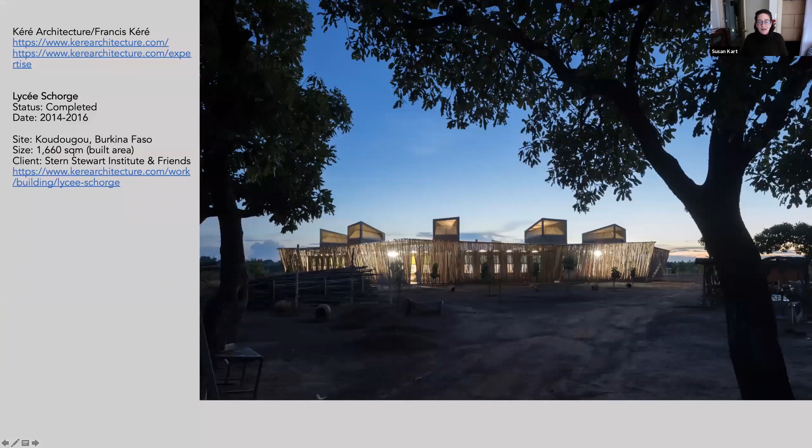So I put together a slide on each of those 10 groups that were in that quick little poll.

I wanted to start with Francis Kéré, because some of you have heard of him and his firm, and he's probably, behind David Adjaye, maybe the most well-known African architect. He was trained outside of Africa, as are most architects currently working on the African continent, since architectural training programs are still in the United States and Europe. Yet he has continued to work in Burkina Faso and East Africa, all over the world.

So what I wanted to show you here in this quick image is a picture of a high school that he completed a few years back. There are a couple things he does that I think are really worth mentioning and worth imitating if we want to steal that and move it forward.

One is the community involvement in his projects. Every project he does, especially on the African continent but not exclusively, he's working with the community that it will be impacting, the community that will be using the space, even if it's a private residential house. The other thing he's doing is working with local materials and local vernaculars—local architectural history, local building strategies.

So what you're seeing here—let me click on this, now I'll have to change my screen share so you can see the Google Chrome window I just opened. Hopefully now you are seeing a page from Kéré Architecture.

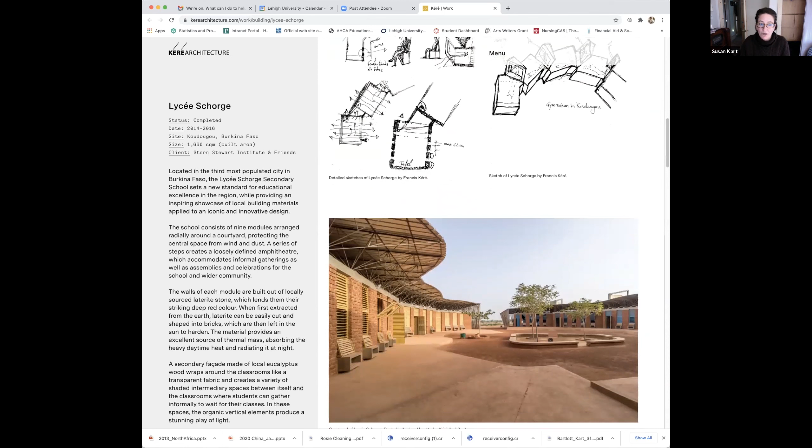I apologize for scrolling a little quickly through his amazing drawings, but what I wanted to get to was this picture of the students sitting outside their school, on these wooden benches. You can see the louvers in action there, which can go up for ventilation but also down for dust. There's no glass in those windows, it's just airflow.

But that wooden screen serves as a dust barrier, a sun barrier, and a heat barrier. It looks like kind of a very rustic fencing structure that isn't exciting on its own, but when viewed within the context of where he's working, it's a lovely way to integrate what's already familiar to people visually with the technology of improving the interior of a school space when you're dealing with tremendous heat, tremendous air, dust, and potentially lack of electricity—so you need to depend on passive lighting and passive air circulation, and those are ways of doing it.

ASA, or Active Social Architecture, is based in Rwanda. It was actually founded by a pair of Europeans who had studied in Italy, in Rome, and then moved to Rwanda and set up an architectural shop there. So while they are expatriates from Italy, many of their partners that they work with are Rwandan or East African to a certain extent.

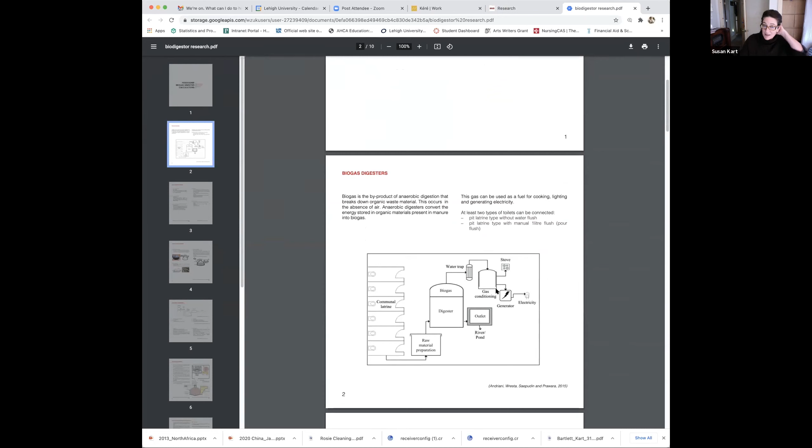The one on this page I'm most excited about is the biogas digester, which may not be of interest to many of you, but they post these beautiful PDFs of how they're dealing with bio-waste, human bio-waste, in spaces where you don't have public sewer systems or public waste treatment. And they're posting that up here.

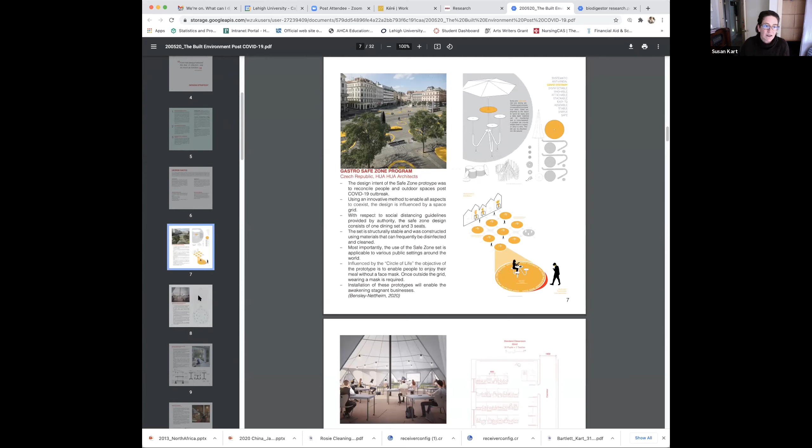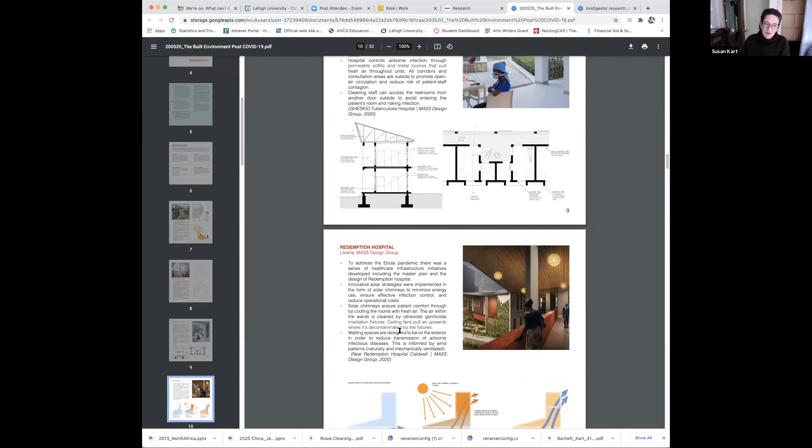The other thing that's happened a lot recently, as you know, is the COVID-19 experience has changed just about everything—the fact that we're having this conversation virtually being a case in point. What I thought was really lovely is how generous they are in sharing their own thought processes, their own research, their own thinking about what might work in Rwanda, but also in the Czech Republic, and in other cities where they've been looking at how do you make social spaces, gathering spaces, that can withstand communicable disease. In Liberia, Rwanda, Haiti, those communicable diseases traditionally have been tuberculosis, and now we're looking at Ebola and COVID and this range of disease. This is going to be a direction public spaces of any sort, and private spaces to a certain extent, are going to have to deal with. I think it's fascinating to look at how these firms from around the world are looking at the same sets of issues for different contexts and making those solutions relevant to their clientele.

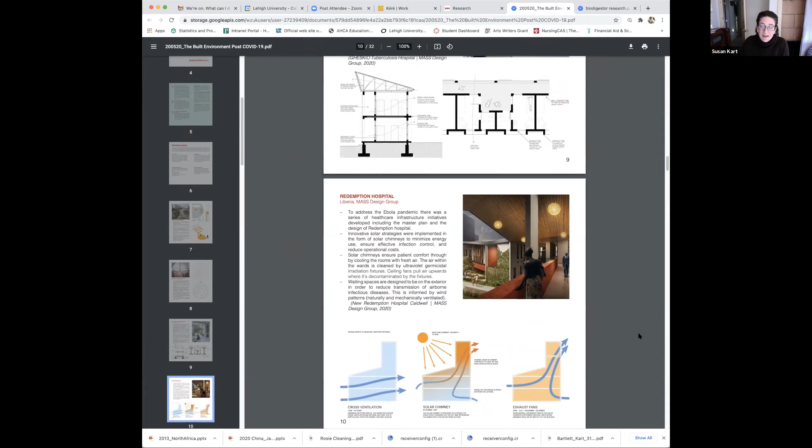Going back now to my slideshow that just jumped out on me there for a minute, I apologize.

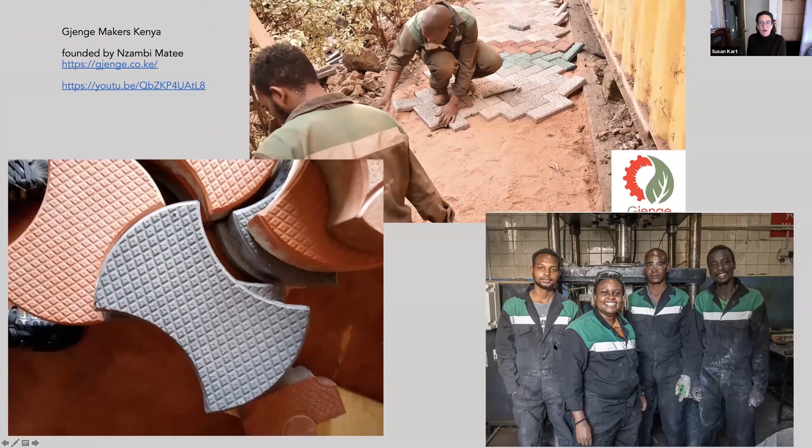What I wanted to also bring to your attention are some of the folks who are involved in various aspects of the design process, but aren't necessarily the architects—these might be the designers, the upholsterers, the interior decorators. There's been a lot of innovation in these sort of smaller industries across the African continent, but globally as well. Given the new digital and technical economy and the order-by-mail economy, a lot of their work has been getting much more international notice.

So you're looking at pavers. These would essentially replace brick or concrete indoor-outdoor paving, made from recycled plastic. This was Nzambi Matee's vision—she's the woman pictured down in the lower right with her staff, taking plastic trash and converting it into these paver blocks that could be used as outdoor terrace paving, parking lot paving, what have you. There's a lovely little YouTube video of her explaining this project and her design of the machine that converts leftover plastic bags and plastic bottles into these pavers. They do ship them around the world, and they make to spec color, size, texture, and density, as far as indoor, outdoor, heavy duty, light duty. While they're not sexy in any stretch of the imagination, they're extremely powerful in that what she's more interested in doing is removing plastic waste from the landscape.

There's still an environmental impact to what she's doing, because the machines that convert plastic bags into these blocks heat and melt the plastic, and that's producing toxic gas. So there's a trade-off that's not ideal, but the fact that she's able to convert something that's waste into something productive, so it's not clogging up the landscape, solves one problem. The problem of the noxious fumes released in the process does await solving. I think we're all getting close to that, thinking about the role plastics play in our environment.

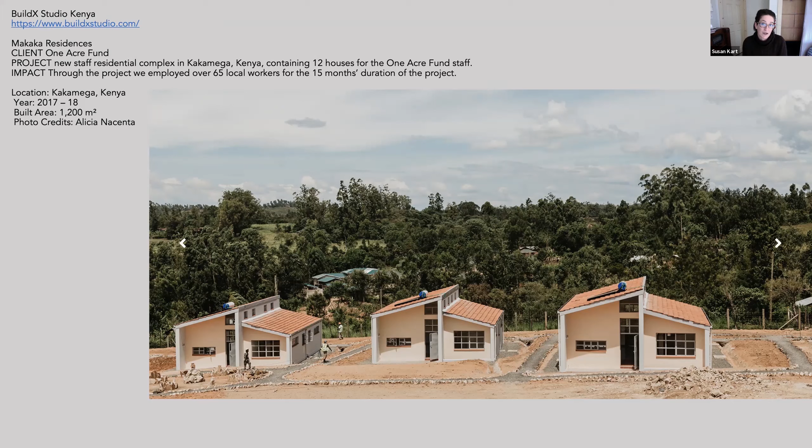Urko Sánchez is a European who moved to Nairobi and is based primarily there, but also maintains an office in Berlin, as does Francis Kéré. Berlin seems to be the other hotspot for a lot of folks who are doing work on the African continent.

They'll tend to have an office in Berlin. It's actually more common than an office in Paris or New York. So Berlin is the other place to find these folks. But Urko Sánchez has been around for a long time, primarily involved in the industry of luxury building.

So luxury hotels, luxury private villas, luxury apartment buildings, primarily in East and Central Africa. I bring his firm and work into the mix because this is not something we necessarily associate with African countries—the luxury architecture market, upscale boutique hotels, or high-end living arrangements. He is really putting to rest the myth that the African continent is full of impoverished people with no access to money, education, or food.

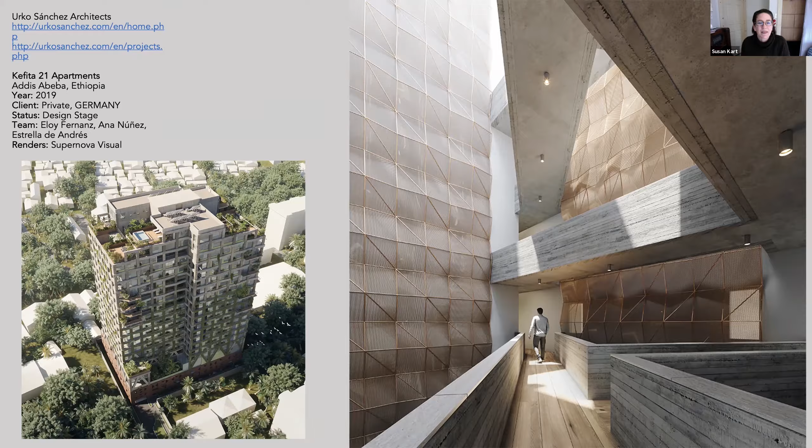Sanchez also—I want to mention that one of his partners is giving a lecture for Lehigh University on Monday from Kenya. Monday from 12:30 to 1:30, his partner Jaime Perez is going to be speaking to our architecture students, showing some of the work he's done with various firms across East Africa, some of whom I've mentioned today. If you'd like to join, you're more than welcome—there's a link later in the presentation to register, if you want to eat lunch and watch someone speak with a lot more authority than I on the architectural details or questions about how these projects are progressing.

What I think is really lovely—let me scoot over to the link at CAUKIN, pardon me for flipping my windows again. This is CAUKIN's website where they talk about the 6 goals the UN established that they focus on as their own targets, areas where they want to improve their architectural practice, to make sure their structures are meeting these 6 challenges. Then there are 4 aspirational goals included underneath those, where they say: these are within our wheelhouse to work towards achieving more of this.

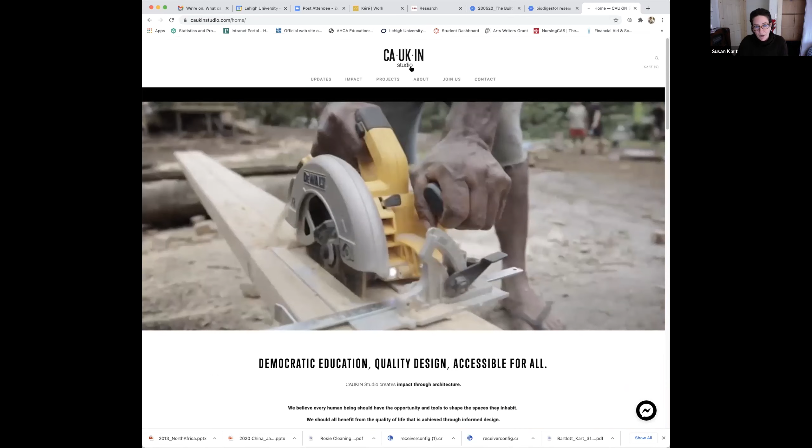This particular firm decided that they could match all of their work to those goals, both previous work and current work. That's the school building I showed you earlier. Their work is global in scope: Indonesia, Africa, Canada, working with indigenous populations, working with design-build partners around the globe, working with local designers and interior decorators. It's a really interesting model, and I recommend spending time digging through what they do, but more how they do it, because it's really exciting work.

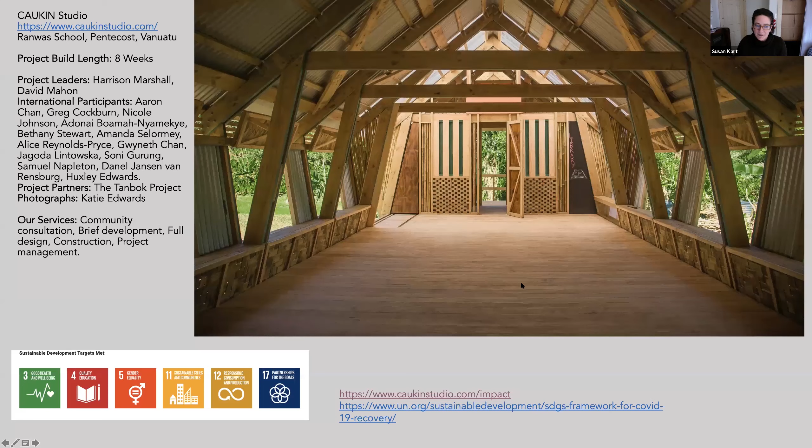To quickly go back here, hopefully now you're all seeing the CAUKIN building back up on my slideshow. Here's our friend Shigeru Ban. This is the sort of quintessential architect that got me interested in architecture outside of the United States. These are just a couple of his projects that I found interesting because they weren't necessarily as predictable.

The transparent bathroom in Tokyo, I think, is really stunning as a piece of civic architecture, for the fact that you can see into it when it's empty and available, and the second you're in it, the glass goes opaque, so you are shielded and can use the bathroom in privacy. But it handles so many issues: cleanliness, security, comfort, within this very elegant and expensive glass facade. All the things that make public bathrooms really difficult for people to stomach—either they smell, or they're dirty, or you don't know who's in there, or it's dark and you don't want to open the door in case someone's sleeping in there—all of that is dealt with in this design, which means that this one structure is performing so many tasks all at once, and therefore almost entirely self-containing.

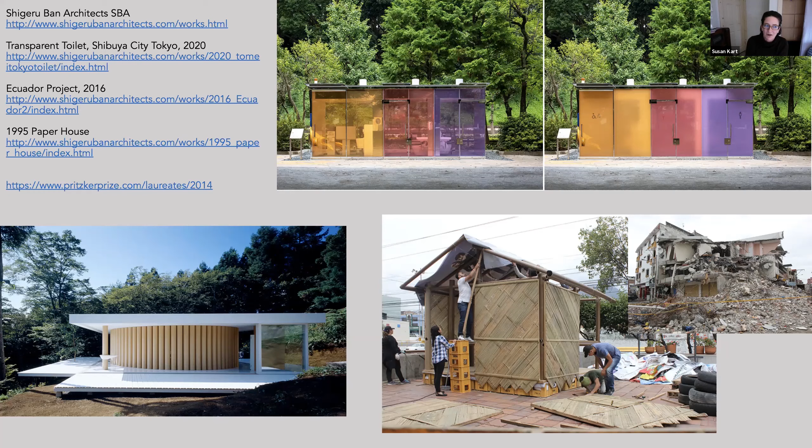We see this in the work of other firms on the African continent. We see Shigeru Ban doing it in Asia. It's something to keep in mind that sometimes the more humble material is actually the more effective, more modern, more sexy material, when thought of creatively.

civic architecture, some residential components of his work, largely with these minimalist forms, inspired in large part by Louis Kahn, who did a fair amount of important work in Bangladesh, sort of in the middle of his career, but also with the idea of having buildings and spaces built at a human scale, despite the fact that they might be serving superhuman needs.

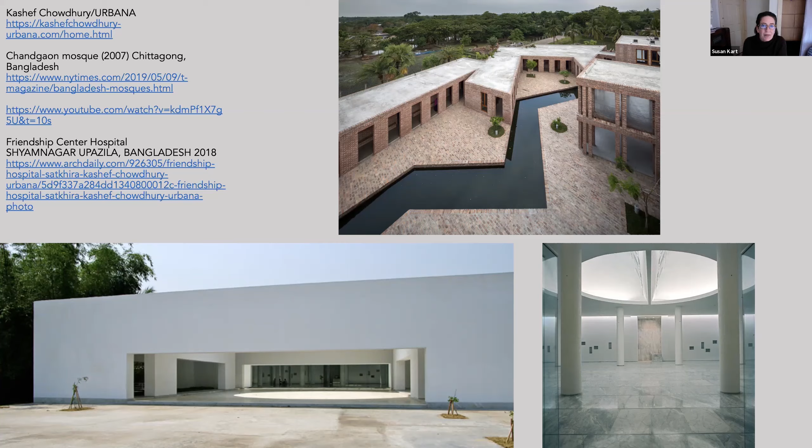This is Marina Tabassum, who was formerly married to Chowdhury, and they've worked together. They still actually do work together, although they each have their own independent architectural firms. Her website maybe is even worse than his. They really could use an American student intern, both of them, to redo their websites and bring them into the 21st century.

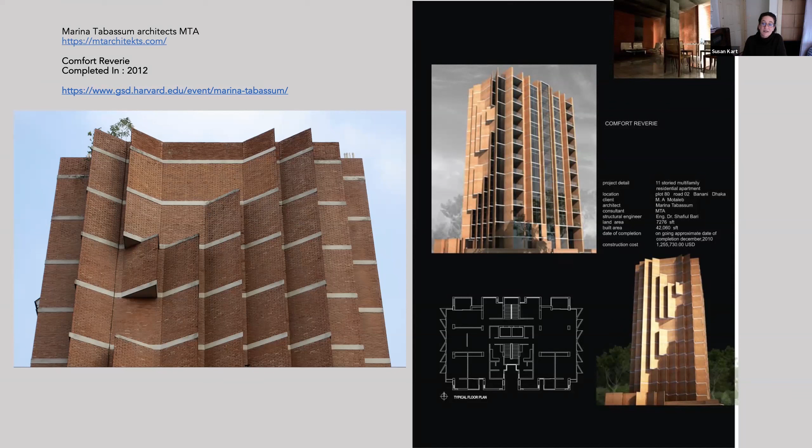This is the architectural presentation on Monday. Jaime Perez will be speaking about some of the projects he's worked on in conjunction with Urko Sánchez, but also work that he did at Buildex when it was still Orchid Studios.

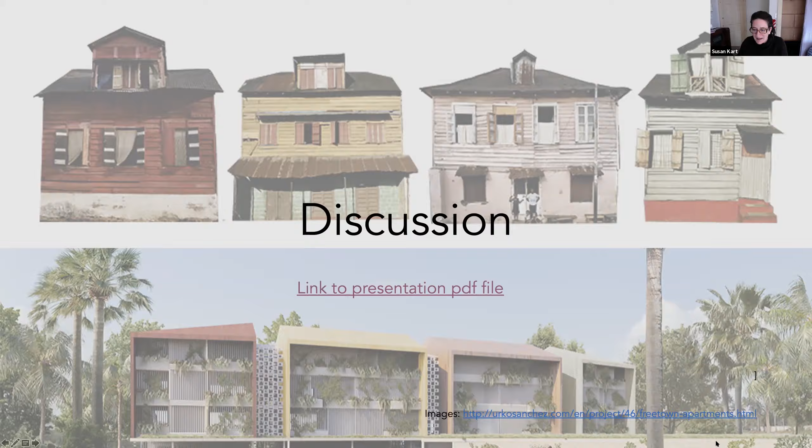So I guess I'm happy to start and ask a question. I think we have some time. You've shown us amazing work from Africa and other nations that people think of as relatively undeveloped, whether they are or not. So my question is, how do you begin to shift your mindset to really start to consider these places as important opportunities to look at influence and new work and new technique, and think about how they may have an understanding of preventing disease in the built environment that we might not have because we haven't had to deal with some of the same things as them? How do you create a perspective shift?

I think that's why I teach, because that's what I'm interested in being able to facilitate. I find frequently when I'm teaching, one of the things I'm doing for about 80% of the time is undoing all the stereotypes. Everyone's seen National Geographic, pictures of starving African children with flies in their eyes and not wearing clothes, and they still keep playing that Christmas song about 'do they know it's Christmas in Africa.' So we're confronted with these really negative, persistent stereotypes of an entire continent that is impoverished and uncivilized.